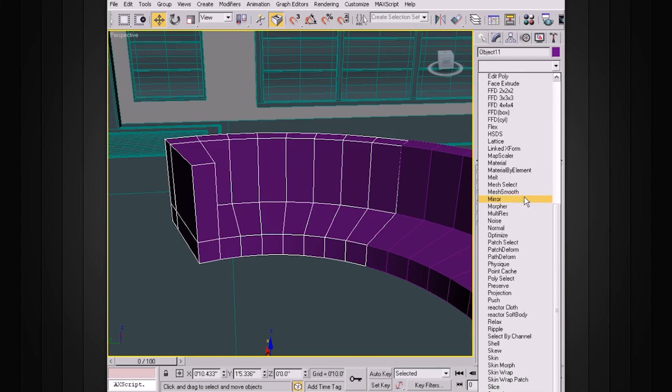So I'm going to go to the modifier list and add a mesh smooth to this. Go ahead and add that, and you can see how blobby that is. It's not really looking the way that we want it to look. I'm going to go ahead and up the iterations here.

So to preview this, I'm going to turn off this show end result right here. And so you can see how I can quickly see the result of the stack, or turn that off. Now what I want to do is edit this poly so that we get some of the edges to be nice and sharp.

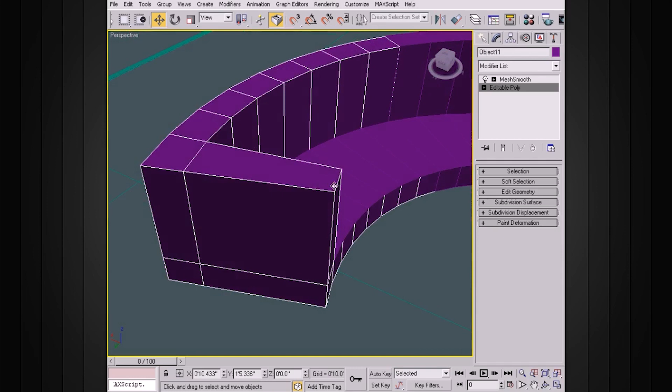Now in some of these we want them to be soft, like the front of this and some of these areas, so we just need to be careful where we add those. I'm going to go ahead and add some edges.

Select the edges that are perpendicular to where we want to add some edges, and we'll go into selection, choose ring, to select the entire ring, and then we'll go to connect, and this time let's drag our segment up to maybe right around here or so.

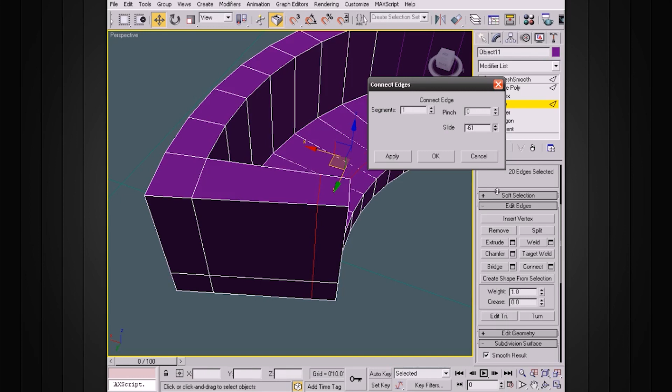And we want to drag that up a little bit farther. Keep in mind that it's going to be a certain amount of hardness here. It's going to basically smooth it from here to here to here, so it'll get a little bit harder.

Okay, we can go ahead and preview that, see what that looks like. You can see how it's hardening things up just a little bit.

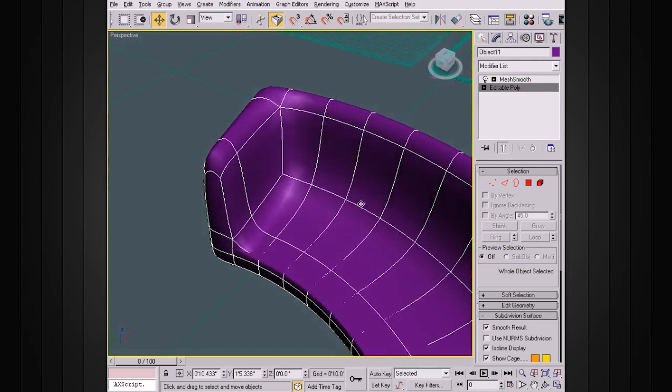We can also go in here and select this edge, again select the ring, and go in and connect, and then add an edge along there. Keep in mind this part will probably be a little bit sharper than the cushions above, right? So there we can preview what that's starting to look like.

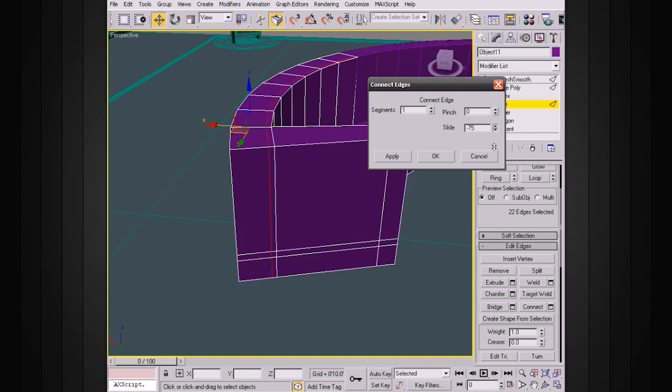Let's go ahead and also add an edge along here, along the back. So go to edge, select the edge back here, do a ring select, and then connect. So you're starting to see how we can use this to very quickly add some resolution here. Now we're starting to see what this is starting to look like.

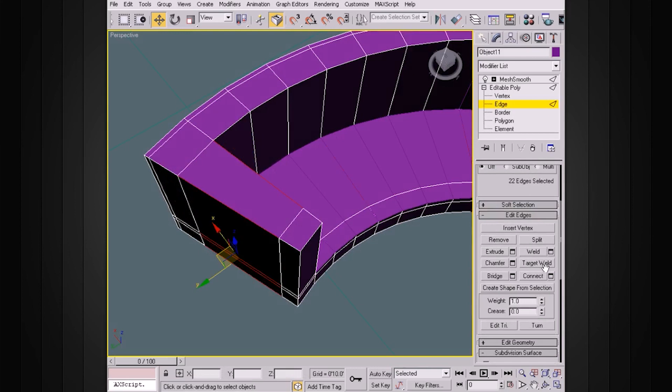Let's go ahead and add another edge right in here to tighten that up. We'll select these edges, select the ring, and connect, and this time drag that edge back here, something like that, so it'll tighten up that corner just a little bit. Now we can take a look at that, and that's starting to look a little bit more like what we want.

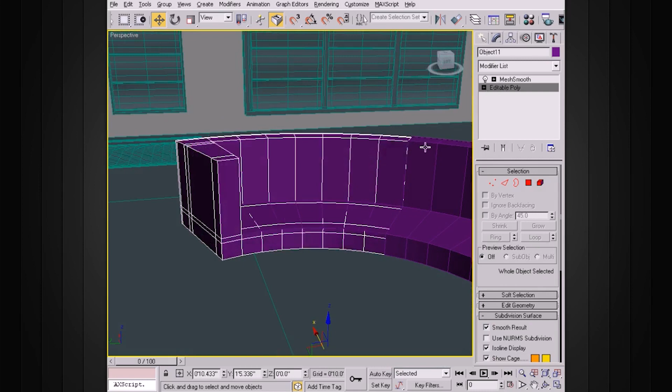Now if you want the side of this to tighten up just a little bit, then we need to add some edges there as well. Same thing over on this side. So we'll select these edges, select the ring, and connect. Go ahead and drag it in somewhere like that.

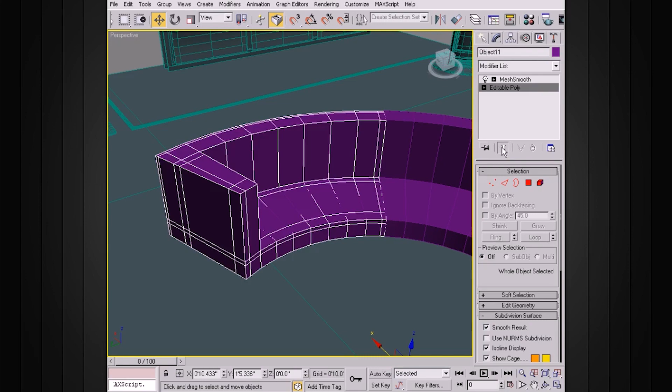And then over here we'll do the same thing. Select that ring and connect, and then run this over in this direction. Then we'll be able to visualize that. So you can see there we've got a sharper edge on the back, still soft, but much softer as it comes over here on the front.

And if you want it to be nice and hard underneath, we need to add maybe one more edge coming right across the bottom there. So again, we'll select the edge, select the ring, and go ahead and connect.

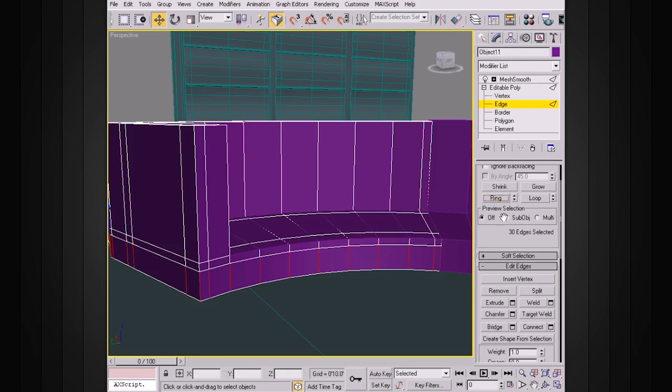And this time we'll drag this down right about here. Okay, once we get this one the way we like, we can use it as a guide for the others, so we want to add the resolution in exactly the same spots. In this case we want to add res right along where these are, so that the curvature is exactly the same, if that makes sense.

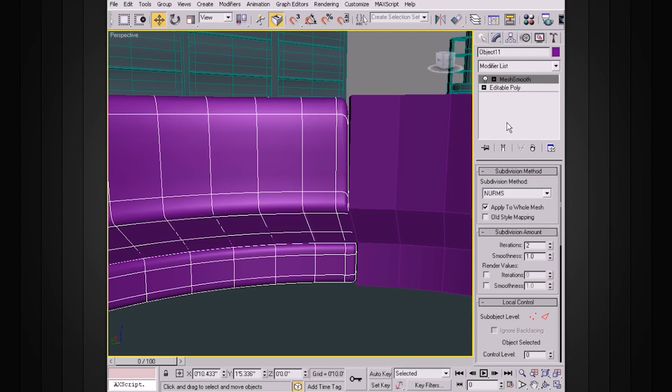Now let's look at the cushions and see what the difference will be when we go in and add the resolution for that. So we've got one of the cushions here. I'm going to add a shell modifier to this just to add some thickness, and we'll add it to the outer amount in this case.

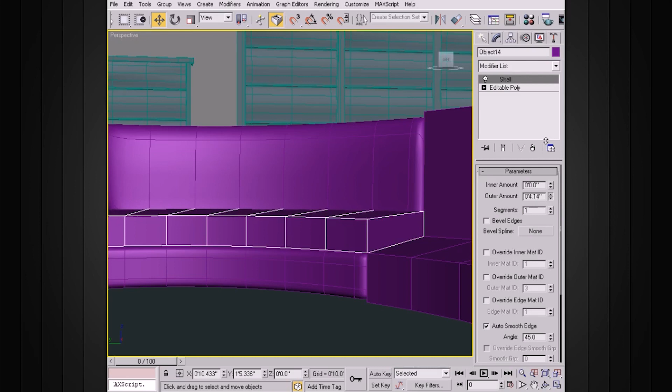We'll drag that up, maybe 4 inches, 3 or 4 inches or so, so just something like that. Now the cushion we want to be a bit softer, right? We don't want it to be quite as hard as the framework that we've got underneath there.

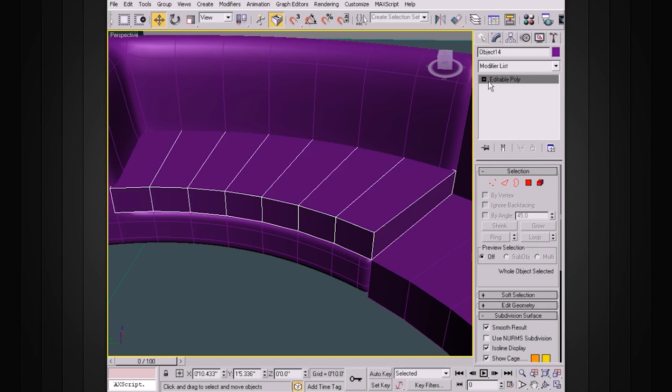So what we can do is just add our lines a little bit farther apart. I'm going to collapse the stack here, convert this to an editable poly. And this time, when we go in and add our edges, we'll add them a bit farther apart.

So we'll go to connect, and we can add two at one time if we want to. For instance, if we want to add one up here and one back here, we can bump the number of segments up. And instead of using this slide, we can use our pinch to move these both at the same time, so we can get kind of like that.

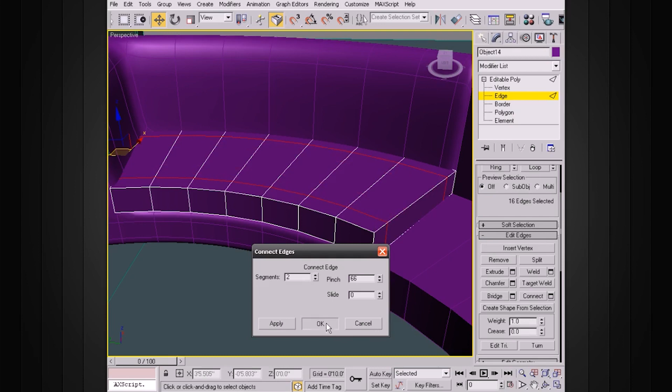Now if we want this side to be a bit harder, we can add an edge along there. We'll select that, select the ring, go to connect. This time we're going to one segment, dial down our pinch, and just simply use our slide.

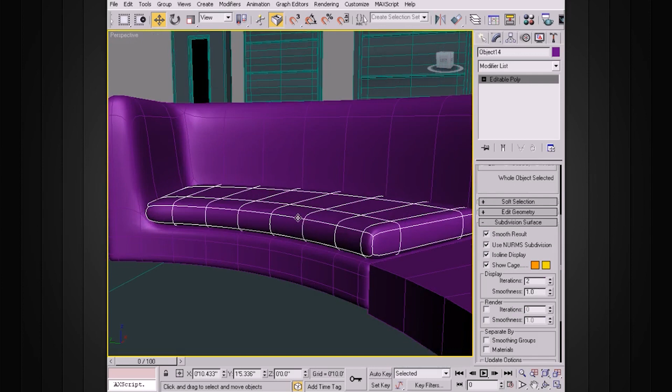Then we can preview this either by putting a modifier on this, or you can go down to your subdivision surface rollout and just check on this 'use NURMS subdivision.' You can change the iterations, and that'll give you an idea, and you can see how that is a bit softer than this harder one underneath.

Let's go ahead and turn that off, and now I'll add one more line right over here. Go ahead and select that ring, connect, and this time we'll move it over to this side. You can look and see how far over you did the previous one, just so it's about the same.

And now we can preview that. Looking at this, you can see that our inside here is very, very soft. So what we might want to do is add a line right along in here. Let's select this edge, select the ring, and we'll go back to connect and insert an edge loop in there, and that's going to tighten up this edge right in here.

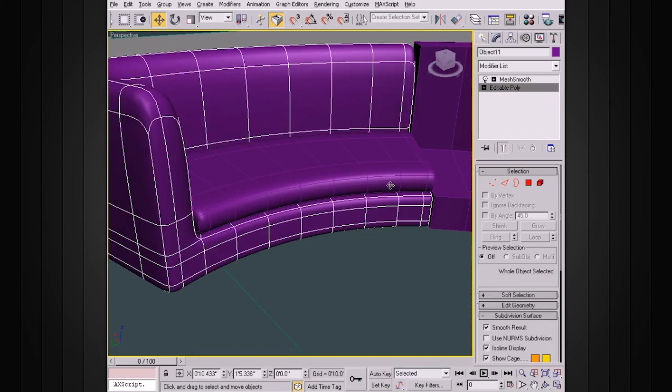We want something along those lines, and you can see how that tightens that up nicely. Okay, so that's basically one section.

So what you want to do is repeat that process on the rest of these pieces. Take your main pieces, add the same resolution that we've added here. You can preview that and see what that looks like, and add that resolution just to match up, so add that same resolution on all of these sections.

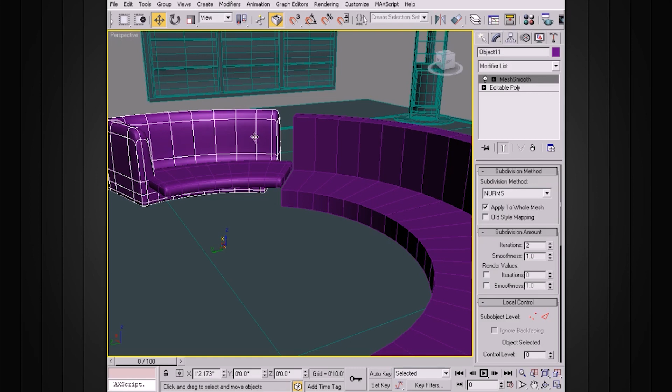Let me go ahead and undo that, I moved it over. Do that move there. So just add your resolution on all of those different sections, and also add your thickness for your cushions. There are going to be seams from the upholstery, and just little things that are going to make it kind of look a little bit more realistic.

So let's look at a couple of things that we can add here. If I go ahead and look at, for instance, this piece here, I've just got this NURMS subdivision turned on.

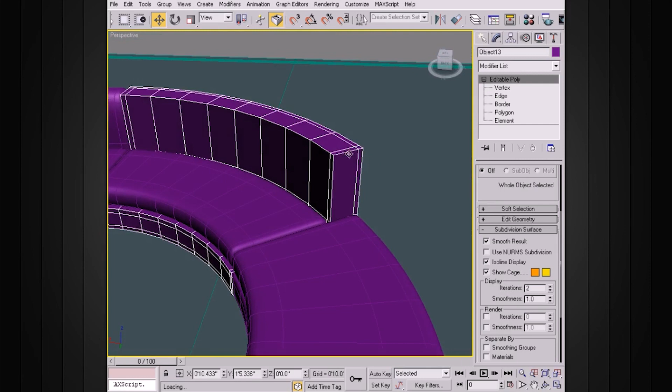If we go ahead and turn that off, we can see that this is pretty low res. So what we want to do to be able to access some of these edges and create some of the seams is to actually add a modifier.

I'm going to take this guy as an example and add just a TurboSmooth to this. You can either use this, or you can up the iterations if you want to. I'm going to try it at a lower number of iterations, down to 1.

Now to actually access these polygons, if you go ahead and click on this, you're not able to access those new polygons at all. So what we need to do is add another modifier to the top of the stack.

In this case, we'll add an Edit Poly modifier above the TurboSmooth. This allows us to come in under the Edit Poly, select the different sub-objects, and then select those on our object. So I'll simply select one of the edges right along this side here and select the entire loop.

Now we need to turn this into a loop of polygons rather than an edge loop. To do that, we can go down to Edit Edges and use Chamfer. Go ahead and open the settings, and we'll dial our chamfer amount down fairly low until we get the width of the seam that we want to create there.

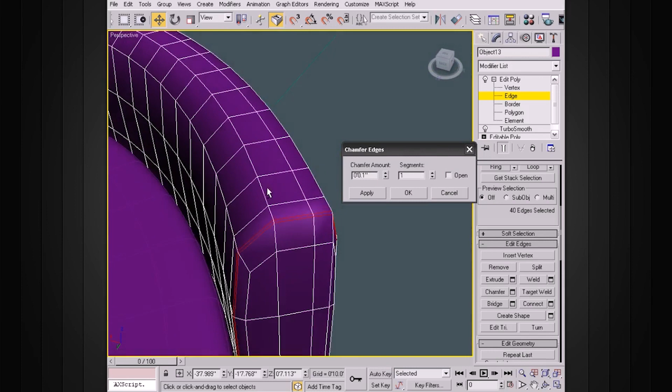Maybe something like that, we'll say OK to that. With those edges still selected, go up to our selection rollout, hold down Shift, and click on our polygon icon here, and that will select those polygons.

Now we can go back down to Edit Polygons and do an extrude. We'll do a simple extrude, set extrusion type by local normal, and pull this out just slightly. Then we could maybe do one more that is a little bit farther out, and say OK to that.

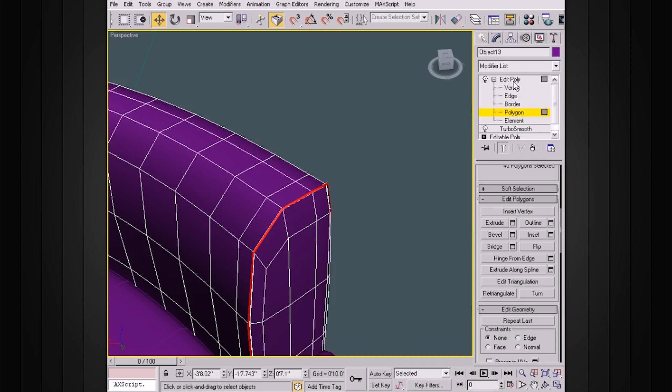Now if we were to take this and add another TurboSmooth on top of it, then if we turn off our edged faces, we can see that we've added a bit of a seam there. We can up the iterations if we want to make that a bit smoother. So that gives you that kind of a look.

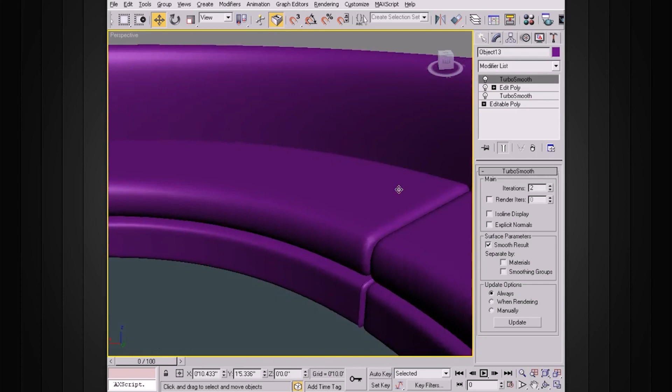You can do the same thing on the cushions or the side here on this side as well. Just go ahead and add a couple. I've gone ahead and added a smooth, so we're able to access a higher res version of this. Now add an Edit Poly modifier to actually edit those polygons.

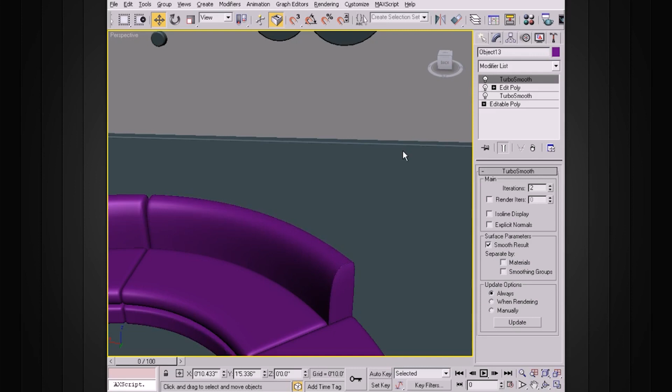You can see if I come in here and take off my modifiers, I'm able to go back to the original. So I can turn these all off, and I'm now back to my original geometry. This modifier stack is a very powerful way of working, with the ability to do all these things and still go back to your original if you need to.

Keep in mind that if you're not seeing the changes that you have in here, you may need to turn on this Show End Result, depending on what kind of modifier you're using.

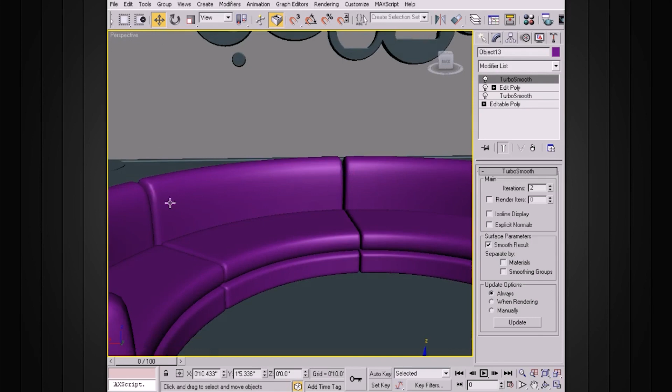Go ahead and do the same thing to the cushions. If you want to have a seam along the sides of the cushions, you can do the same exact procedure here, and also any sort of seams you want on the sides of these back pieces. We'll go ahead and finish doing that using the exact same procedure.

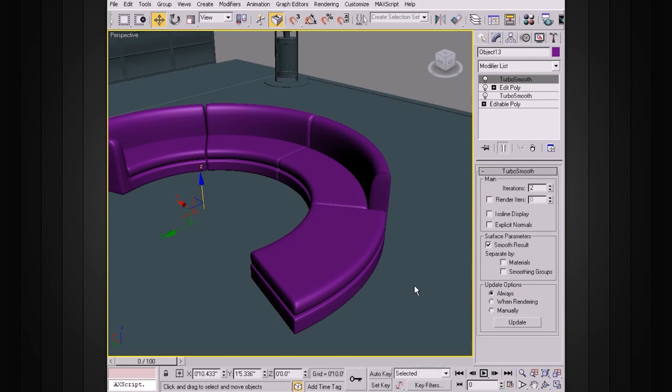In the next lesson we will come in and start to add some irregularity to some of these things. Right now everything's very smooth and very CG-like, so we'll look at a very easy way to come in and start to break things up a little bit and rough things up so that they look a little more realistic. We'll go ahead and look at that next.